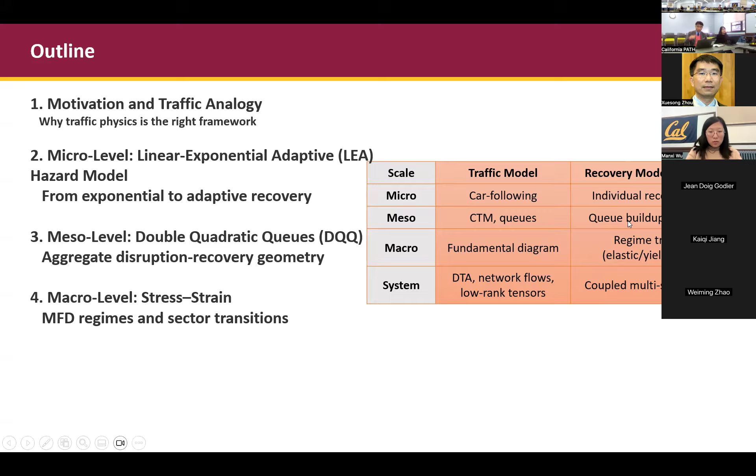Okay, so I will go very quickly through the motivation, and then I try to apply a multi-resolution micro, meso, and macro level traffic flow to the recovery model. The goal is quite simple: traffic flow theory provides a very unified mathematical language to describe flow dynamics. So I try to apply what we learn and use the framework to describe recovery.

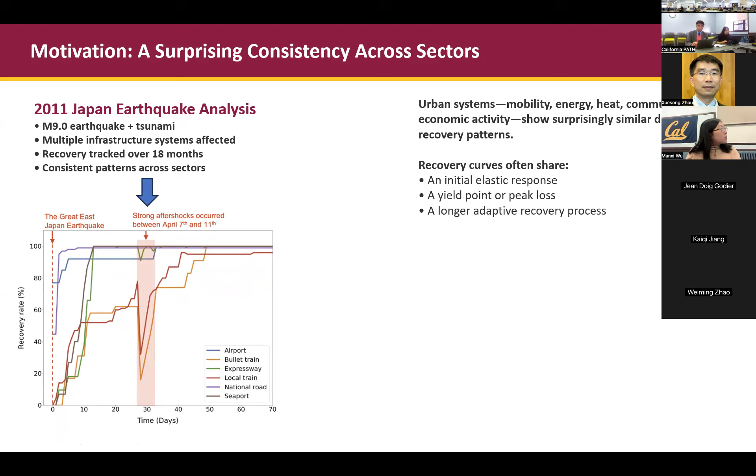So I'm using one motivating example, the 2011 Japan earthquake. Here is the data set we have. The x-axis is different days, and we see different sectors such as airport, bullet train, expressway, and local train. They all recover in different ways, but in very similar curves.

So what I try to promote here is we need to understand all the fundamental properties from the notion of a recovery curve, or fundamental diagram of recovery. On the right, I show we have the initial elastic response from material science, and then we have the yield point, or the capacity point, and also different adaptive recovery processes.

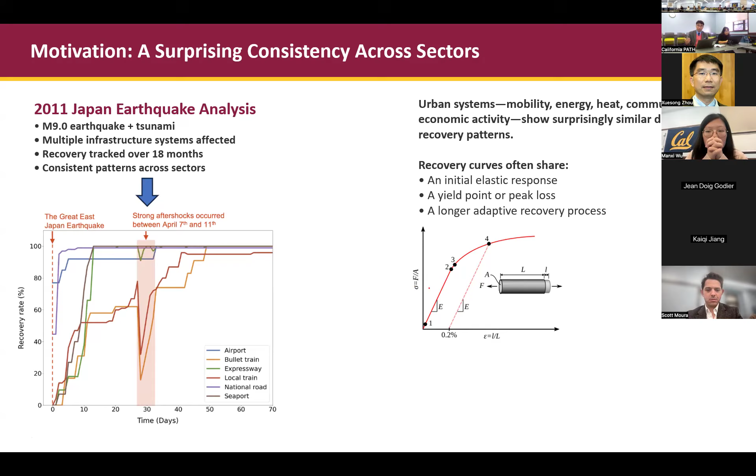So here I try to show step by step how different urban systems can have similar disruption-recovery patterns, and then establish the traffic flow theory in this area.

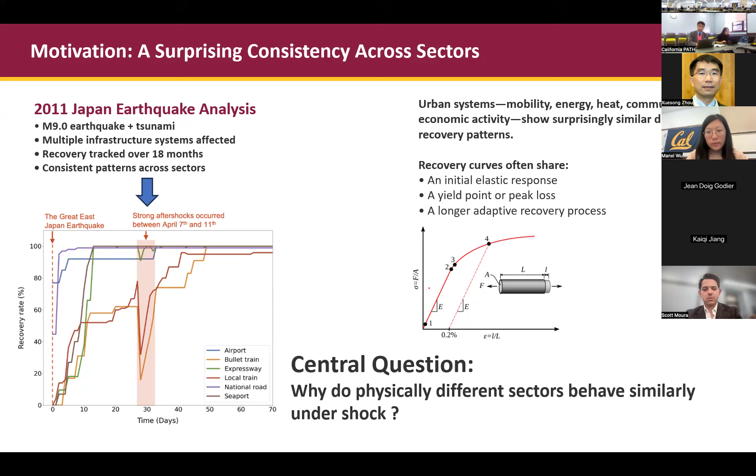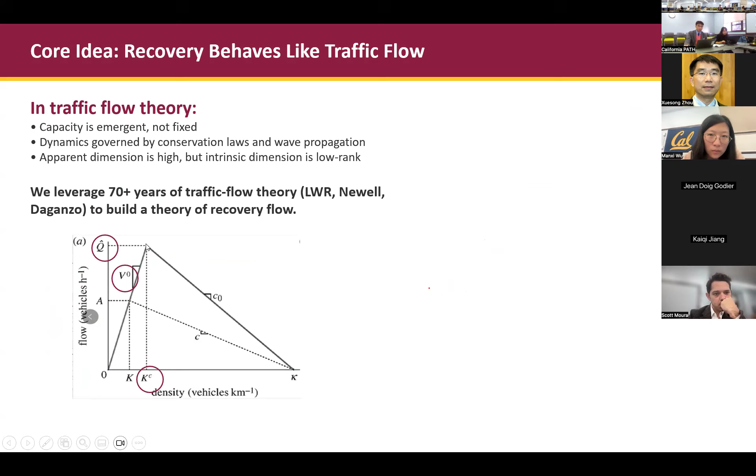So the question is, can we try to describe all the similar behavior after the shock? The answer is yes. On the left, we see these 70-plus years of traffic flow theory coming from Professor Greenshields, Professor Newell, and here I try to show the capacity, the free flow speed, in this volume-density curve.

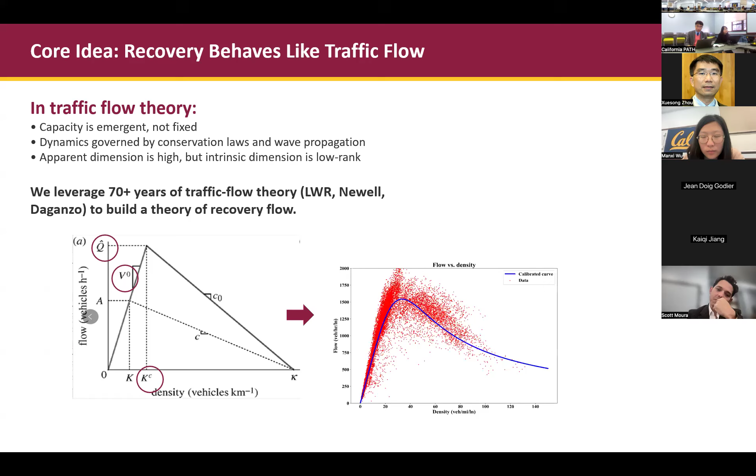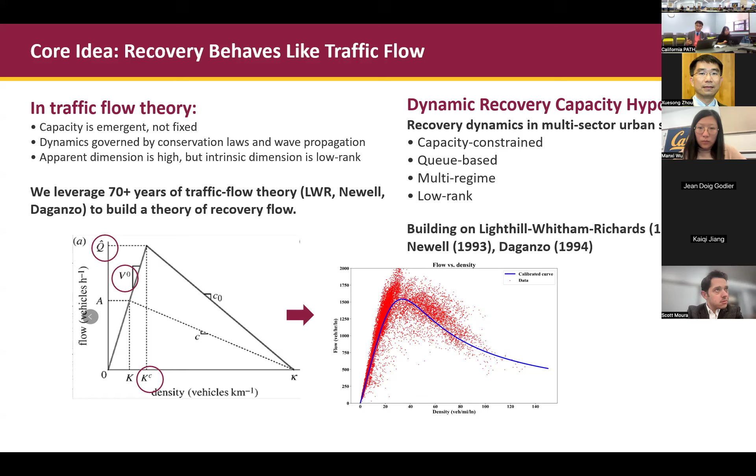But more importantly, I try to highlight here: when we try to understand such a system, we need to understand, number one, there's a capacity constraint. Number two, we can relate this traffic flow dynamics to queue-based understanding. And also we have free flow versus congestion, with different discharge rates, so it's a multi-regime behavior. Then the last point is, when we have multiple dimensions of data, we need to use the low-rank property to capture the structural differences of all this underlying behavior.

So again, I try to show my learning curve. In the next few slides, I will talk about the car-following model, cell transmission, the queue model or cell transmission models, cell representation, the fundamental diagram, and my own area of network flows.

But I try to show that, in parallel, in resilience, we need to study similar multi-resolution behavior to understand how individual disrupted units, such as vehicles, trajectories, or communities, can recover. Do they have a healing capacity? Do they have this disruption-recovery geometry? And how do different sectors respond in different ways, but in some kind of fundamental diagram?

So this is my mapping from traffic flow across different scales, all the way to the recovery dynamics.

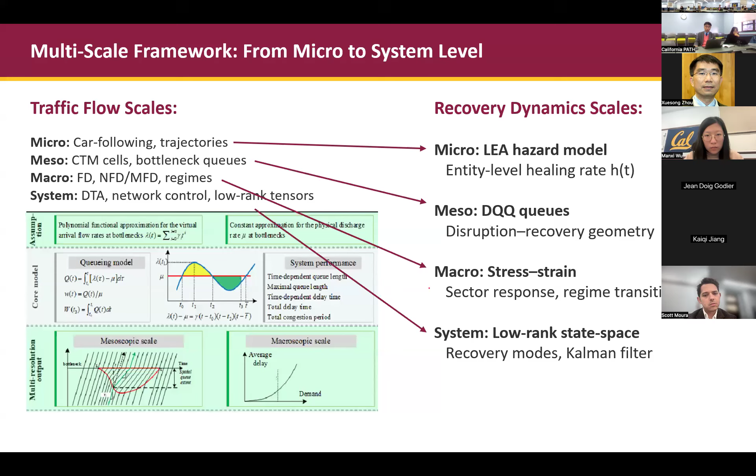I will touch all the different points individually, so please allow me to go to some fundamentals. Professor Daganzo has given me a lot of education here.

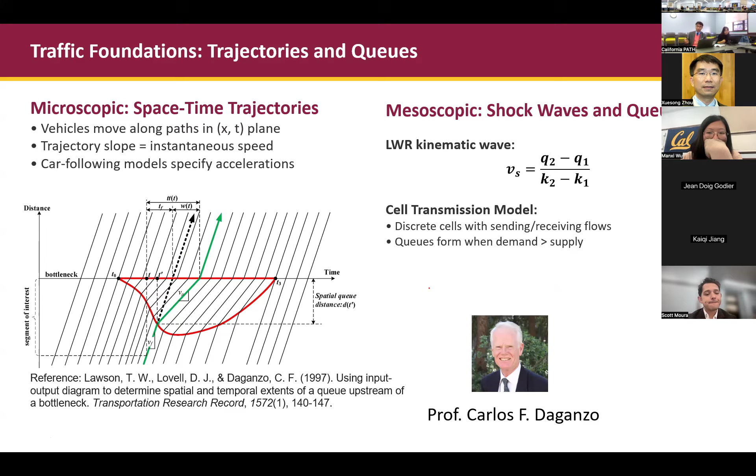Here on the left is a space-time trajectory, mapping the virtual queue to the physical queue. I won't go through all the details, but I want to show that from the individual vehicle's perspective, going from free flow to congestion, you have this virtual waiting time, as I'm showing here with my mouse. Professor Daganzo and his former students in 1997 provided a very elegant theory to map virtual waiting time to physical waiting time, and developed a cell transmission model for us to compute kinematic wave propagation much more easily when demand is greater than supply.

Another thing I learned from the UC Berkeley school of traffic flow scholars: here is the NGSIM dataset with a time-space diagram, and there's a shock wave. Along the shock wave, we also see different trajectories, so when there's a merge or lane-change behavior, there will be a disrupted trajectory.

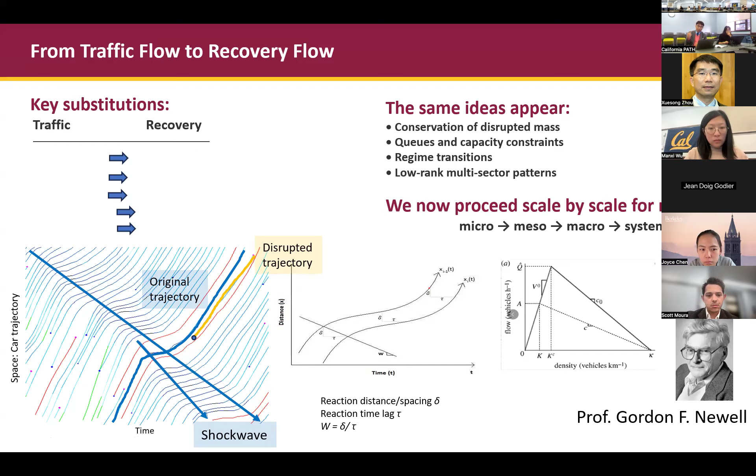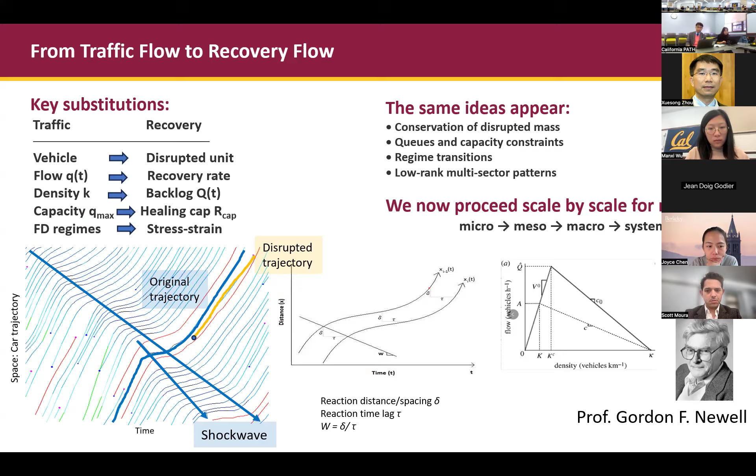From there, we should understand a vehicle could be viewed as a disrupted unit. Flow could be viewed as a recovery rate. Density is a backlog due to the disrupted capacity. Then the capacity point in the fundamental diagram could be related to the healing capacity, the maximum healing rate in our fundamental diagram. So I'm making an analogy, but in the next few slides I'll show the analytical forms for the different cases.

Let's look at one person, one workplace, and consider one disrupted unit. This is an old-school COVID-19 dataset, but it has different sectors. This is a Google mobility dataset with activities related to parks, recreation, grocery, and pharmacy. All of these show disruption and recovery, and this disruption-recovery pattern is the return to normal, similar to our traffic flow.

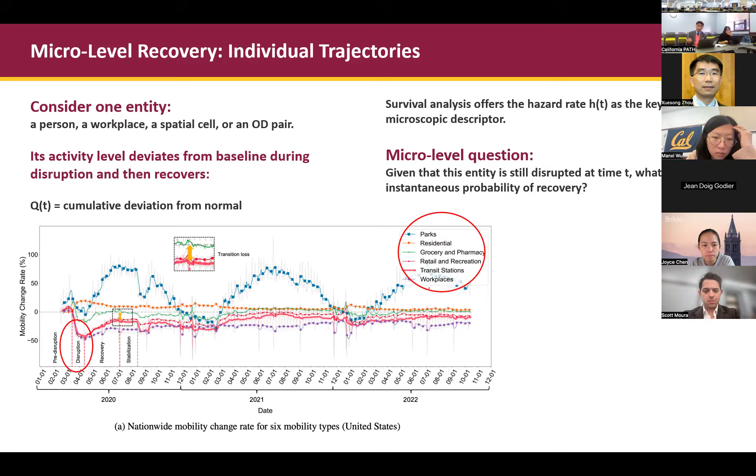In our traffic flow, we have the breakdown, and then it takes some time to return to normal. In our analysis, we ask the question: suppose this entity, a community or activity type, is disrupted at time t, how can we model its instantaneous probability of recovery? There are three outcomes of this recovery: recovery back to normal, recovery with transition loss, and recovery with transition gain.

To make it clear, I draw a baseline representing 100% of normal. After COVID-19 or any major disruption, we see transition loss and transition gain. Here I show transit stations in San Francisco, California, where we still see dramatic transition loss, and how we can use different incentives to improve transit service or attractiveness to reduce this transition loss is always a good topic to study. In comparison, in Arizona, the transition loss is less dramatic.

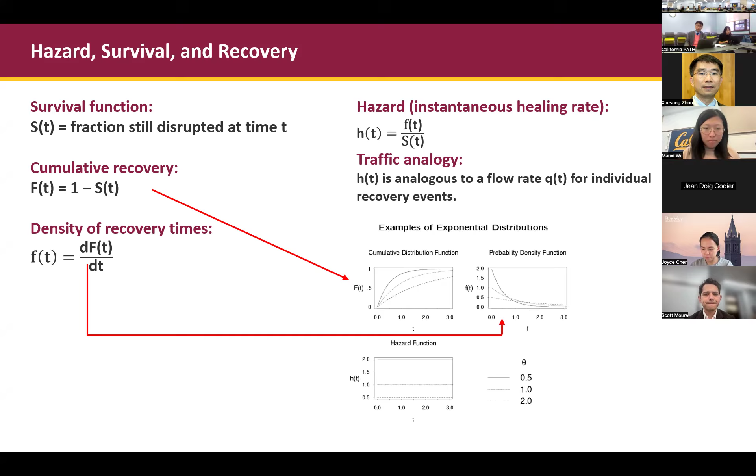The simplest hazard function is an exponential function, with a constant hazard rate. But in our discovery of learning community recovery, they have a fundamental diagram with three terms: initial healing intensity, the time to peak healing, and the shape parameter. If you look at the hazard function, it's very similar to our fundamental diagram with free flow speed, capacity point, and the breakdown or congestion branch. Using similar forms, we're able to capture these different stages of recovery, because we know that if there's a transition loss and a static condition, the instantaneous recovery rate will be almost zero. This is something we need to capture.

Can I ask a clarifying question? Yeah.

How do you define disruption? It could be external events. In COVID it's the disruption due to disease, and in traffic it's maybe the traffic breakdown so that capacity reduced dramatically. Here I'm looking at the time series, looking at the activity level from the baseline of 100% reduced and then coming back. I artificially draw a line at this cutoff point. Before the maximum reduction, I call it disruption. After the maximum disruption, I call this recovery. So this is my definition.

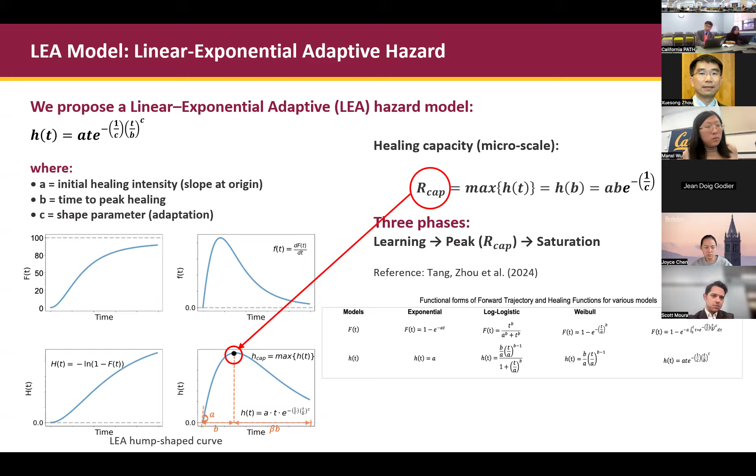So similar to our traffic capacity, we need to set the maximum recovery rate. This is the whole purpose of our study: the disruption, recovery process, and traffic flow fundamentals. By using this curve, we look at all the recovery rates, and you can see clearly for the different activity types—residential, transit, workplace—they have the maximum recovery rate.

From the beginning, because the gradient is 0, they're always coming from the so-called 0 position. And then to the end, they reduce to almost 0 because they reach a stable condition—they just could not recover further, which somehow explains why there's always transition loss, because transition loss means the recovery rate goes to 0.

So other experts might first apply the exponential model, but the exponential model just assumes a constant recovery rate. No, we will not be able to capture this shape or this hump behavior.

So I will not spend more time on the individual behavior. This is another thing I learned from Professor Daganzo's introduction: the fluid queue model.

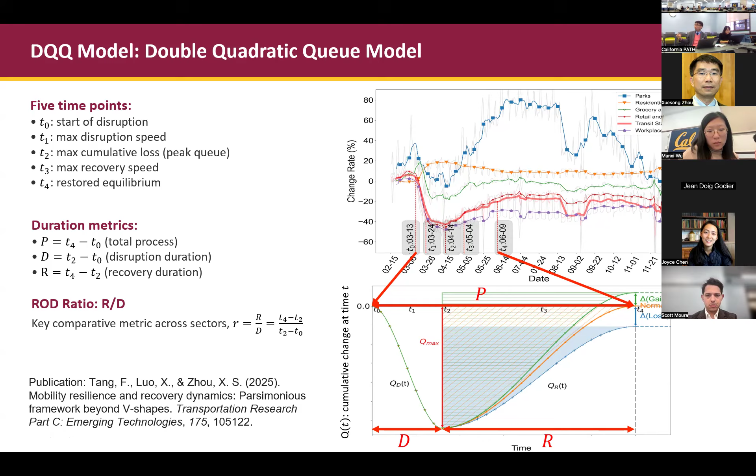Then we go to the fundamental diagram. So on the left, this is our free flow congestion region of the fundamental diagram. I try to apply the similar transition, try to just get two things in this curve. One is when we have the major disruption. So the y-axis is a disruption. The x-axis is a transition gain and transition loss.

So we see three regimes. One region is an elastic region. Another region is a yield region, which is a capacity region right here. And I try to just show that someone who can understand this fundamental diagram could apply this to the stress-strain model. Basically, more disruption will create more transition loss.

But when we try to look at the COVID-19 data set, in fact, that small disruption may introduce some transition gain. For example, for the activity of residential, activity of going to the park, actually we see the transition gain. And if we try to model in the long term, the transition, maybe I'll speak a little bit closer to this. Yeah. We can try to build a linear relationship between the disruption magnitude and also the transition change. So here we develop a similar fundamental diagram to describe this behavior using the COVID-19 dataset.

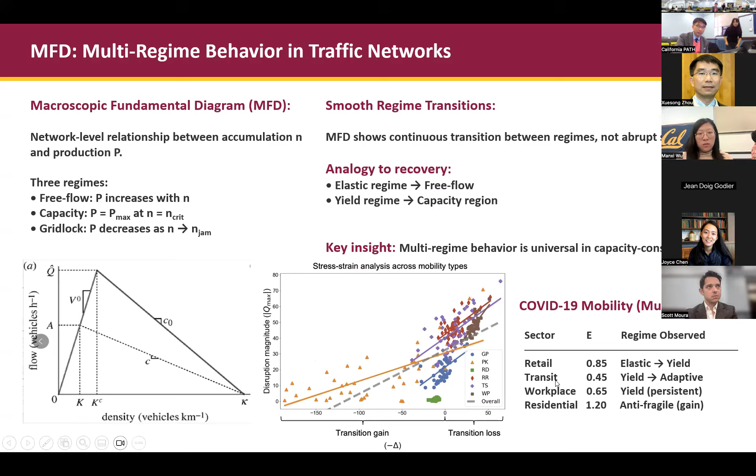So I think folks here say, hey, COVID-19 is already history in the past. So let's try to look at other phenomena. So here we are using the extreme heat in Phoenix. We will use the queue-based temperature model. So as you can see here, we can have a similar inflow rate as a solar radiation input. We can model the outflow rate as a cooling rate. And then the temperature is accumulated heat energy.

So in this way, we can use this very simple model to describe the inflow, outflow, and the accumulation of temperature, as a result of accumulation of energy. So by using this kind of analytical tools, we can quickly discover forests have a higher discharge rate, and the urban area, developed area, has a lower discharge rate, so that it will take a longer time to absorb all the heat wave, compared to other land cover types.

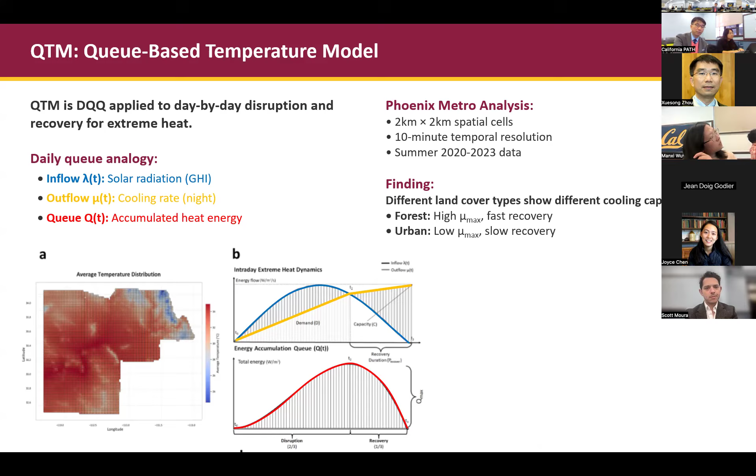So we can further try to use this stress-strain model. I call this a material science model, but it has a very similar form as our fundamental diagram. Then we will be able to capture the yield point associated with a different land cover. And then this will be quite useful, for example, to know how much land should be developed, how many forests we should keep in place in order to counter these extreme heat conditions.

So in this graph, the horizontal axis is the relative extreme heat recovery duration. So you can see in Phoenix, we have almost 6 or 4 hours of recovery. And then the y-axis is the given input of radiation energy input.

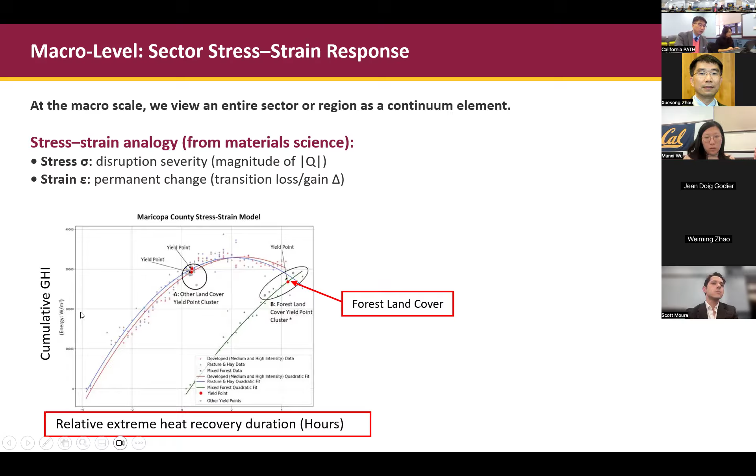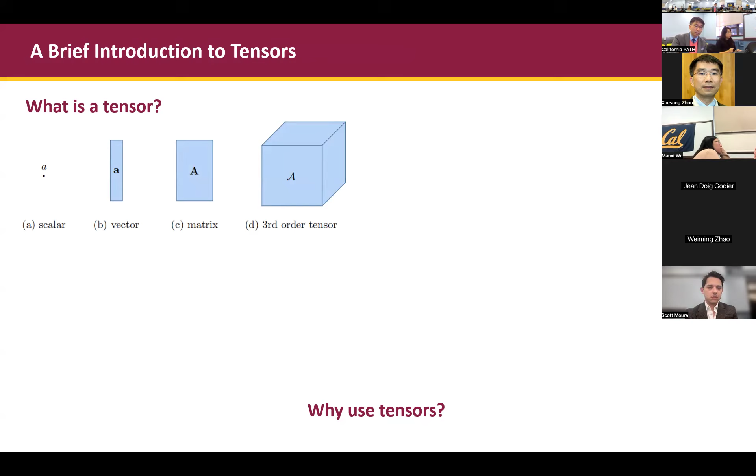Then after I try to study the 3 different levels, very similar to traffic flow, I will go a little bit deeper. I will try to introduce tensor. So we already know a scalar is just one element, and then we have a one-dimensional vector, two-dimensional matrix, three-dimensional tensor. In traffic, we understand the OD, origin-destination matrix, is a two-dimensional matrix, and then the path as origin, destination, and the path flow.

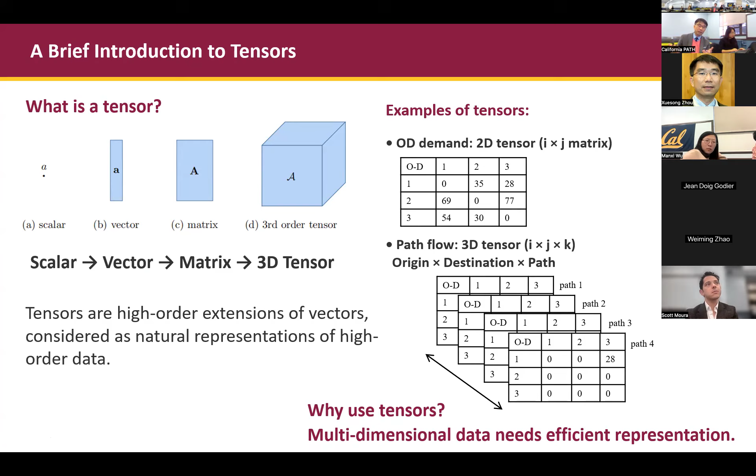Okay, so what I want to say is in the disruption recovery process, we have many data sets. We have multiple dimensions. We have the dimension of region. We have the dimension of different activity types. We have the dimension of different commodity types. So we need to have an efficient representation.

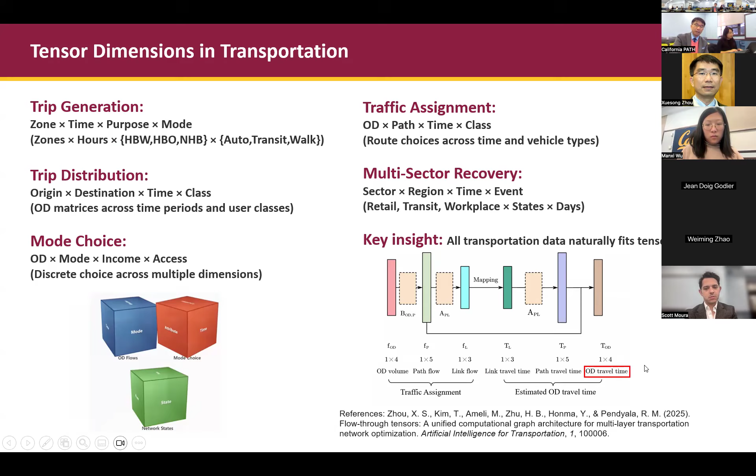That is why we try to use the high-dimensional tensor to represent trip generation, trip distribution, mode choice, and recently we try to connect many different tensor blocks together so that we can efficiently use the forward propagation, backward propagation in our computational toolbox. I'm not going into any details. The reference has been provided here, but I try to just show that by representing the tensor in the first place, we are able to provide the capability of compression.

So if you try to look at the image as a matrix, then you can try to apply an SVD, with U as the left singular vectors, sigma as the singular values, and then V transpose will be the right singular vectors. If you try to understand this from our OD demand matrix, you have OD pair on the y-axis, you have time as the horizontal axis, then you can try to represent U, which maps OD pair to rank or to latent, and then the diagonal elements capture all the essential elements, and then we have latent back to the time dimension. So we apply this very elementary method as the first step; we can introduce tensor decomposition to capture the structure difference, the structure representation of all the different data sets.

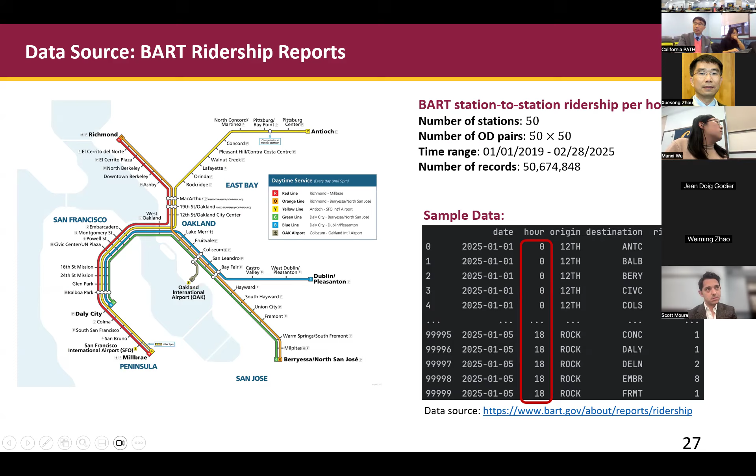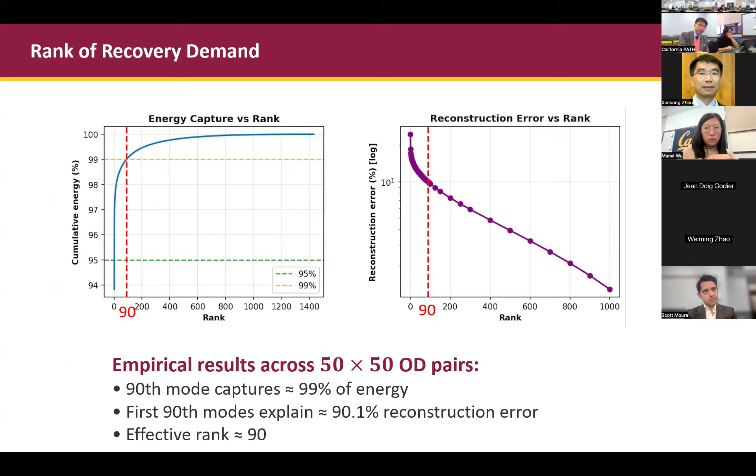So if we apply SVD, then the question is, how many ranks do we have? So first of all, we do look at all these weekdays, weekends. We do look at all the other disruptions. Interestingly, if we apply SVD, a rank 90 or 90-dimensional matrix is sufficient for us to capture 99% of cumulative energy, or maybe you can call this variance, and has less than 10%, a very small error. So what we try to show here is, first of all, when we deal with a very large scale matrix from the demand side, we should be able to capture the most essential demand pattern. If you look at the recovery demand from our early examples, state by state, agency by agency, different sectors, we also see a very uniform low rank structure for this recovery trajectory.

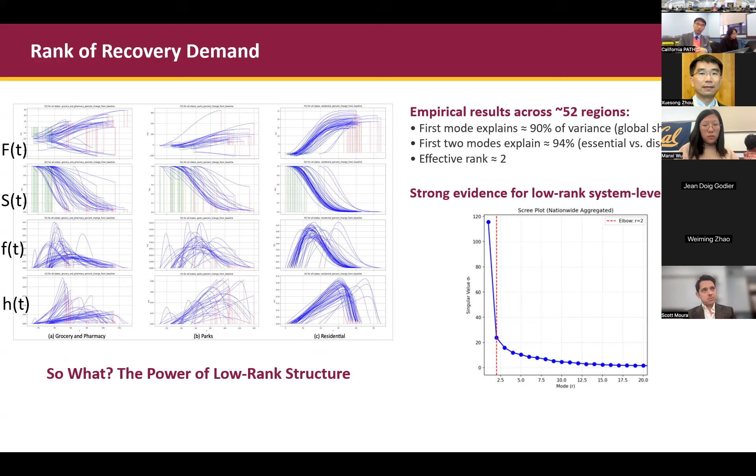We did some elementary study. 90% of variance can be captured by the first rank, which has different weights on the different activity types in the different states. Then the second mode can also explain another additional 4%, as this dimension weighting matrix to describe essential trips versus optional trips. So when we try to push further, you do see we all have a long tail, because just using this very simple SVD is not sufficient to capture all these random structure deviations. The message here is there's a common structure representation. We can try to reduce this kind of demand and recovery process.

So since we are traffic network researchers or analysts, we always want to look at the demand and the supply. So you already see right here, I try to show a high-dimensional demand tensor. This high-dimensional demand tensor has its own internal rank, could be 90, could be 2. So typically the demand has a high rank compared to supply. The supply tensor is the number of trips we provide, say the frequency for the bus station, and is determined by the average headway leaving from the station at BART.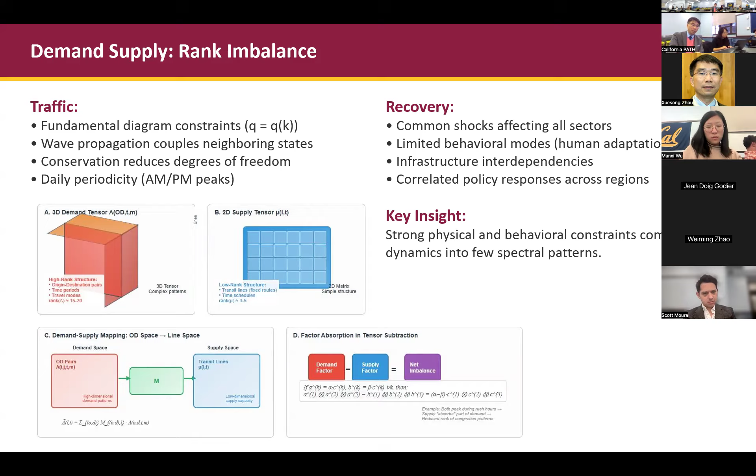So let's look at how the demand and the supply have a very imbalanced rank structure or dimensional structure. So what we look at is the train timetable in BART service. Interestingly, when we look at all these timetables, they have either a 10-minute headway from early morning 5 a.m. to 9 p.m., or a 20-minute headway on other lines. Which means they have a very low rank structure on the supply. And this explains why the supply should be relatively adaptive or flexible to provide matching to the time-dependent demand.

We can also look at the reversible lane on the Golden Gate Bridge. We have the early morning peak and the afternoon peak in different directions, so we change the lanes. This reversible lane can be viewed as a measure to provide a higher rank of the supply so that we can minimize this structure difference between demand and supply.

So since we're here at Berkeley, I have to look at Professor Gordon Newell's classical work on matching demand and supply dynamically. Here is one of the very classical papers on continuum approximation in 1973. In this formula, you have cumulative arrival, you have cumulative departure. I don't need to derive all the detailed formulas, but Professor Gordon Newell derived that the optimal rate of dispatch is equal to the square root of the arrival rate over the length of t. So this is a very significant concept very early on. Then the question for us now is, this is a one-dimensional result.

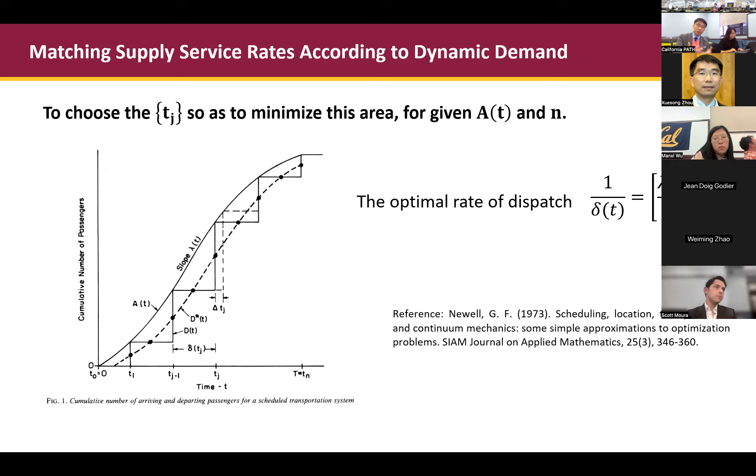How we can apply this to multi-dimensional OD pairs, different time periods, different activity types, different service types. So I just try to use this as a motivation to further study this compression method. So recently, we do look at all these optimizations through the latent pattern.

The traditional method here is we always enumerate all the OD pairs, enumerate all the paths, so we get millions of variables. So if we are able to compress those large numbers of variables, could be random variables, could be multiple dimensions, such as Uber, such as Waymo, they don't have a regular schedule. So how can we capture this kind of capacity supply in a structural way?

So there are many applications to do network design, traffic signal timing, by looking at this latent structure. And this latent structure can capture not just a single day, but multiple days, similarity in our design. Professor Varaiya in 2018 has a low-rank approximation method for traffic signal control, which proves that by relaxing this fixed timing to be a little bit dynamic, we can reduce the signal delay dramatically, say by 5% or 10%, without even going to a fully adaptive signal control that requires loop detectors.

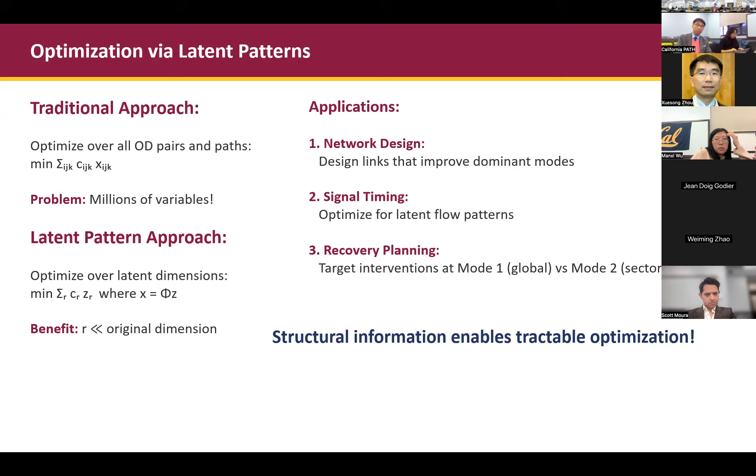So in summary, I try to promote a multi-sector recovery model. At the current stage, we're moving toward a system-level state space model. So here, the Y is all the multi-dimensional observations. The X is the latent state. So we need to compress the observation to the latent, which is the matrix C here. So this is the singular value decomposition we try to explain.

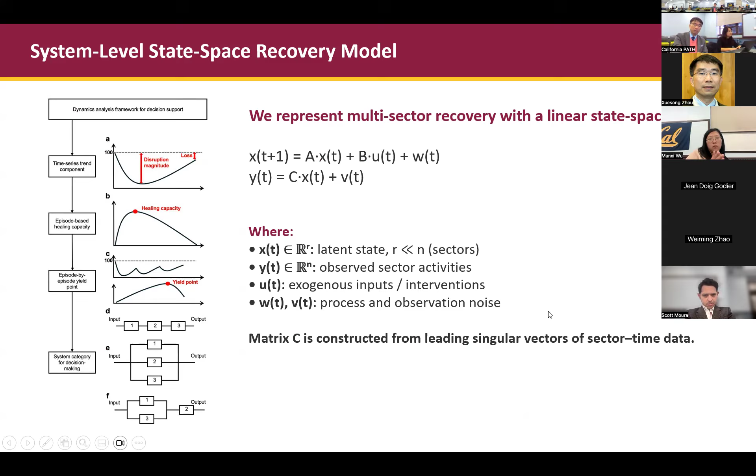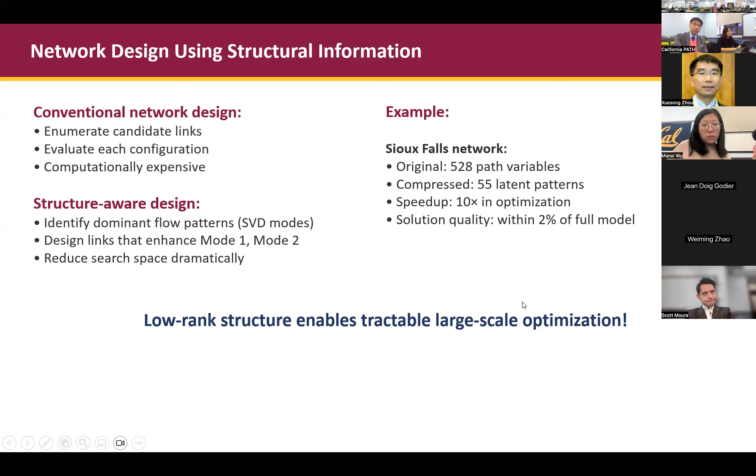Moving forward, I just try to show that we are recently working on a different data set, the Chicago regional data set. We can very quickly compress these path flow variables from 1 million to a magnitude of 10,000, but still reach reasonable solution quality.

Going back to, well, were you able to test it at all on the bigger network? Yeah, I tested also Chicago regional. Same base layout. Chicago regional has about 30 million paths. Thanks. Okay.

So I have 3 principles I learned when I try to apply traffic flow dynamics. Principle number 1 is capacity is dynamic. So we do look at our healing capacity and our healing capacity diagram. So I hope that more study is devoted to healing capacity, just like the Highway Capacity Manual, because healing capacity is an important indicator for communities to allocate different resources for the recovery. Even earthquakes, there are unpredicted earthquake events, fault lines. So we just need to enhance our overall healing capacity in response to unpredicted events.

Principle number 2, multi-regime behavior. So previously, when we look at the hazard function or the recovery function, people might just simply use an exponential distribution to provide the data fitting result. But here, from all these COVID-19 data sets, we can see a common thread as elastic, yield, adaptive, a 3-stage behavior for us to further study.

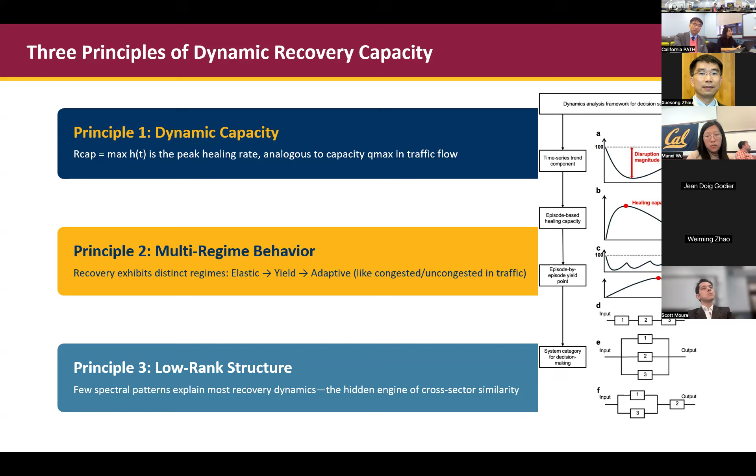So the last message, as you can see here, is low rank. We already know traffic is low rank because we have the fundamental diagram, we have wave propagation, we have a conservation law due to the capacity. So we have to highlight here that recovery also has a low rank structure because human behavior is very similar, and we have this infrastructure interdependency.

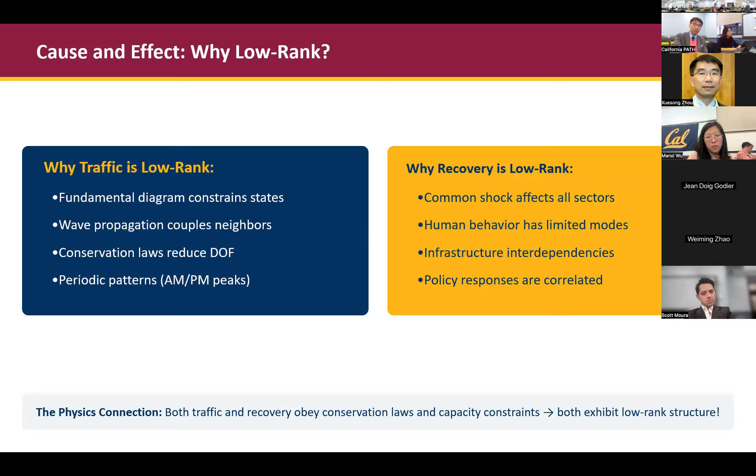So the learning curve I have here is, by using all these foundational traffic flow theories, we should be able to provide more analytical guidance on recovery planning. I don't need to demonstrate all my mathematical equations, but I feel that we should be able to apply much of the know-how from the volume delay function, fundamental diagram, conservation law to construct a much more efficient recovery dynamics model.

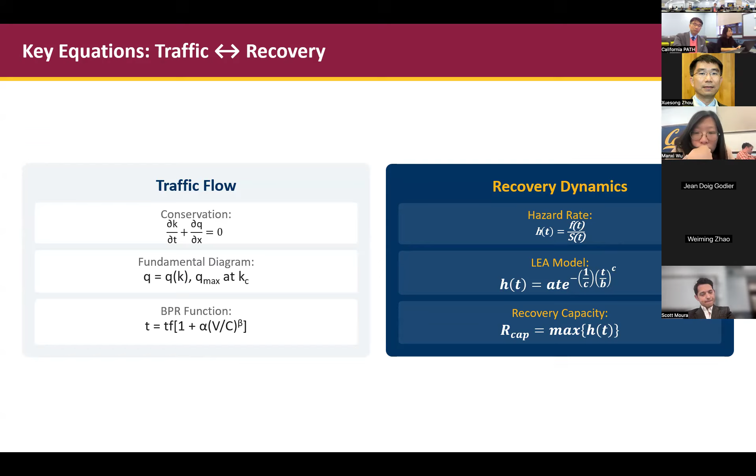Okay. Future research. So I do have a lot of assumptions in this study. I assume it's some kind of stationary point, but the recovery process never stops.

I can only statistically determine the stationary point, and also all the multi-sectors are coupled together, such as activity of the land use with activity of the travel, and they also have this cascading failure. Some of the transit agencies just could not recover, and then they go to the extreme of reducing service dramatically. So I think along this line, I learned quite a bit on the complexity of this recovery process.

So the practical use of this study is in climate change and climate adaptation planning. When we say planning, we need to plan for resources, and the planning of the resources should be attached with capacity allocation. Previously, there were a lot of studies talking about recovery capacity, but here, with my co-authors, I try to define this capacity more precisely. This is also related to long-term infrastructure investment planning and how to prioritize the different investments.

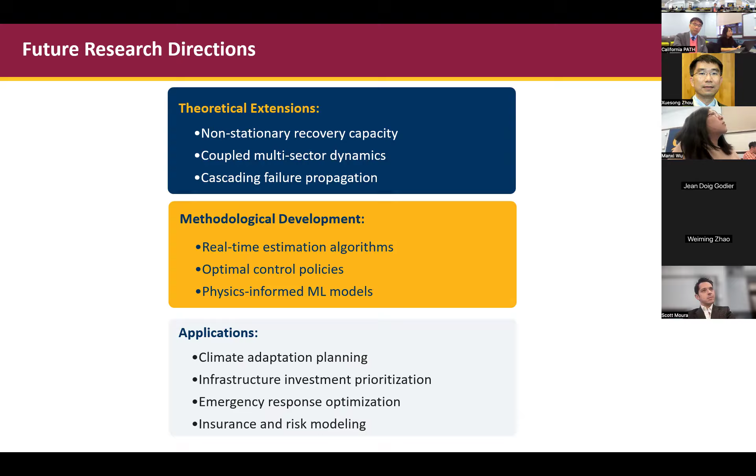I think this is the end of my talk. I try to show my appreciation. I graduated from UT Austin. I studied with Hani Mahmassani, and Hani pushed us to apply traffic flow physics. Our school actually comes from traffic flow study all the way to another different branch, but eventually, I want to advocate that we need to apply our traffic flow physics to recovery behavior.

So here, my former supervisor Hani Mahmassani passed away early this year. So we summarize this paper, serving as in memory of all his guidance and pioneering work on dynamic traffic assignment. Okay, so I'm open for questions. Thank you so much.

I have a question. I'm very curious and interested in this low rank part. When you do network optimization and decision making on top of the low rank structure, the low rank structure actually depends on the decision that you're going to impose, right? So how do you make sure that what you are learning is actually the low rank structure of this mapping from decision to demand? Yeah, this is a very important question.

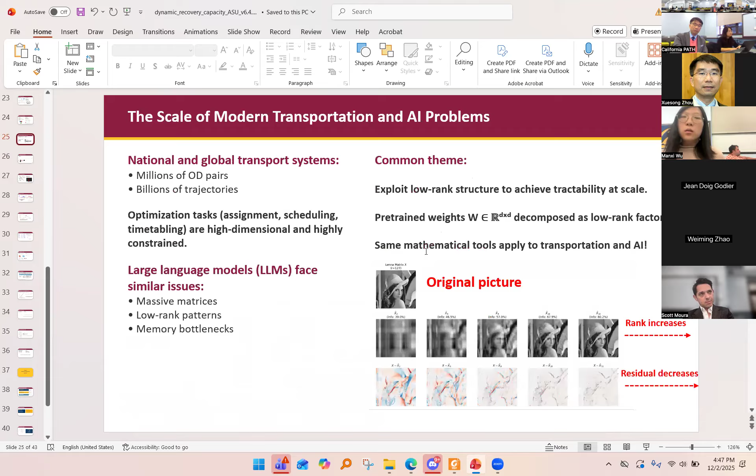So it will be very interesting to look at, if I use a linear mapping, how much it can compress. And when I make the projection back, I do always see approximation error. This approximation error is guaranteed by the SVD approximation error formula. Okay, I see. So did you find that, for example, the principal vector or this low rank structure depends on the physical network structure, or the complexity of the decision-making problem?

Yeah, I can use my experience here with path flow. For example, in the Bay Area, 5,000 zones times 5,000 zones, 80% of all the OD pairs are minor, with maybe 1 or 2 or even 0.1 volume going from origin to destination. If I try to enumerate all these millions, 30 million paths, the problem becomes too difficult to solve. Basically, I have to get my dominating paths first.

Other researchers may simply abandon all these not so important flows, but when you abandon them, you abandon 10% of the demand. So we try to provide a balanced approach to capture the major flow impact, with some reasonable approximation to the minor flow. Wonderful, thank you. Thank you.

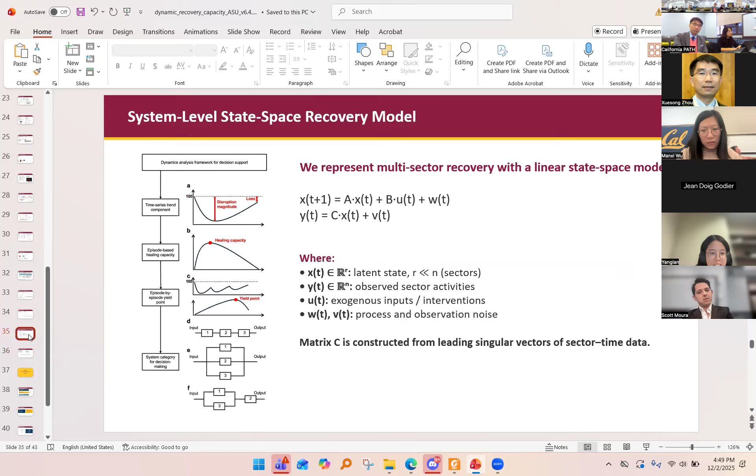Any other questions from the audience or from the online audience? Sorry, I have a question. Yes, please, go ahead. Hello, Professor Zhou. Thank you for your presentation. I'm interested in the part about large scale optimization. Can you move to that slide? Oh, sorry, can you hear me? Yeah, we can hear you. Okay.

In these slides, you said you can use some latent patterns to deal with origin-destination pairs, and then use optimization methods to control something like traffic signals to solve this problem in a more efficient way, because the previous data is so large. My question is, when you optimize things like traffic signals, how do you make sure the OD, the vehicles, obey such traffic signal settings? Because the data you get is just historical data, how does it then obey the new traffic timing calculated by your model? Yeah.

Can you... yes, you understand my question? Yeah, I understand. I mainly just work on the offline problem. For the online problem, the transition from the current stage T to the next stage T+1 still requires a lot of data to study.

My dissertation was all about OD estimation. I was using PeMS data set in the Bay Area, thanks to Professor Varaiya's introduction, and I tried to apply this OD estimation Kalman filter. So I just could not comment further, because with all these transition matrices, if everything becomes latent, it's something too complex to define yet. I stay offline for now, but I think you reach a very important point.

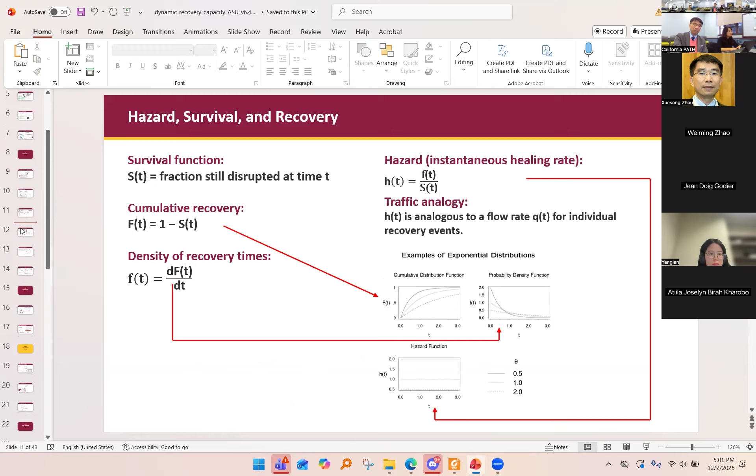I apologize if this question is too broad, but I'm curious how you feel the explosion in transportation data we've been seeing, and will continue seeing over the next few years, might impact your work. Take OD pairs as an example - what you've been working with are existing travel demand surveys, but we're moving away from that. I'm curious how the approaches you've described might be used in this newer big data space we're entering, where it's very uncertain and undefined. I apologize if that's a strong question.